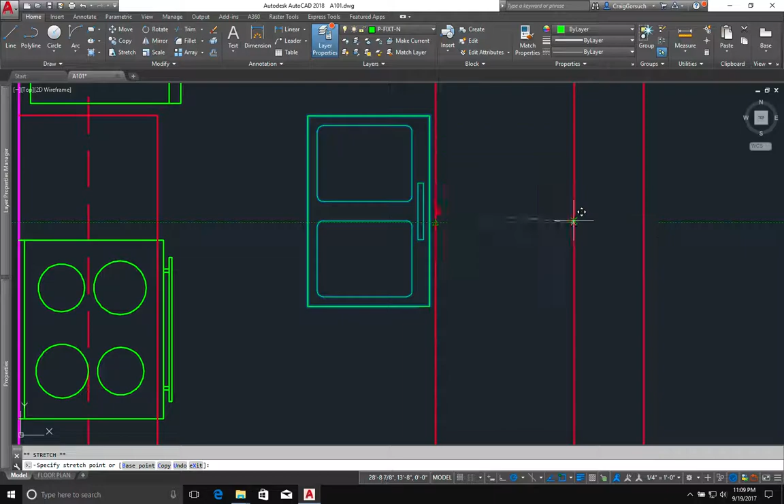Now I want this sink to be centered on this length of the counter. So zoom in, grab a hold of him, and mouse over the midpoint. You get my object tracking. Here we go, you pull it all the way back like that. Left click. All right, now the only thing that I've got left showing here is going to be a dishwasher.

Typically speaking, a dishwasher is designed to fit underneath the counter, and the space for it is 24 inches wide. The actual dishwasher itself is a little bit narrower than that, so you can wiggle and move it around and get it in there. But I also want to see what the overall length of this is.

It should be 9 feet. And this is one of the things that we have to think about when we're laying things out. Yes, right there, it says 9 feet. So if I have, we can think of this as a 3-foot section, a 3-foot section, and a 3-foot section. And I'm going to offset 24 inches.

We'll just stick it down here at this end. And I want this to have the same dashed line as that one. So I can type in MA at the command prompt, press return, select my source object. This is the item with the properties I want to copy. And then click on the item that I want to put it on, just like that.

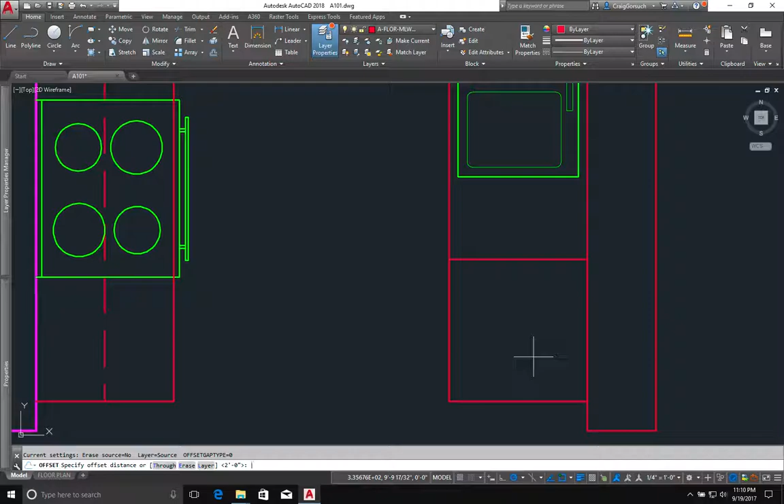I'm going to draw a rectangle, and I want to draw a rectangle right there. Then offset that, oh, let's say we'll offset it 1/2 inch. Zoom in a little bit. There we go, erase that. And now this rectangle we just created,

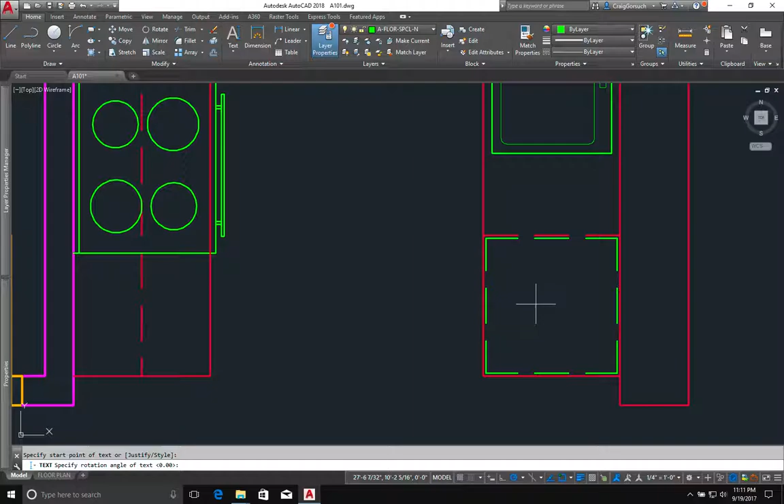I'll set it to Specialties layer and make it hidden 2. I'm even going to come in, let's see, make my Specialties my current layer. Come in for single line text right here. Rotation, I'm going to make it 45. And this is going to be uppercase DW. Press return again.

And this is one of those little things I'm kind of a stickler on. Scroll through here, under justify, middle center. And I want to change its paper height. Well, I don't know, 3/32 seems to be working pretty good. We'll leave it there.

And hover to get that tracking point in the middle, that tracking point in the middle. Drag until I can get them to line up. There we go, just like that. Dishwasher.

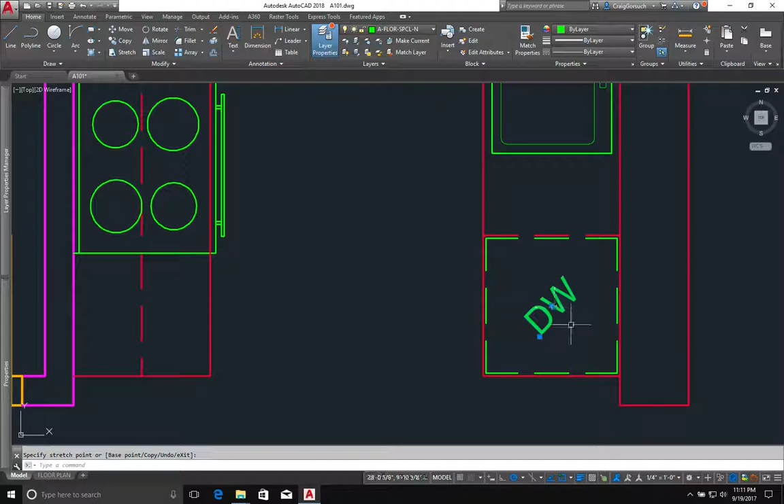All right, and what do I want to put here? Why, that really doesn't look right. I want my dining table here. So go back to the blocks that I shared out with everyone. Blocks, furnishings, let's look at tables.

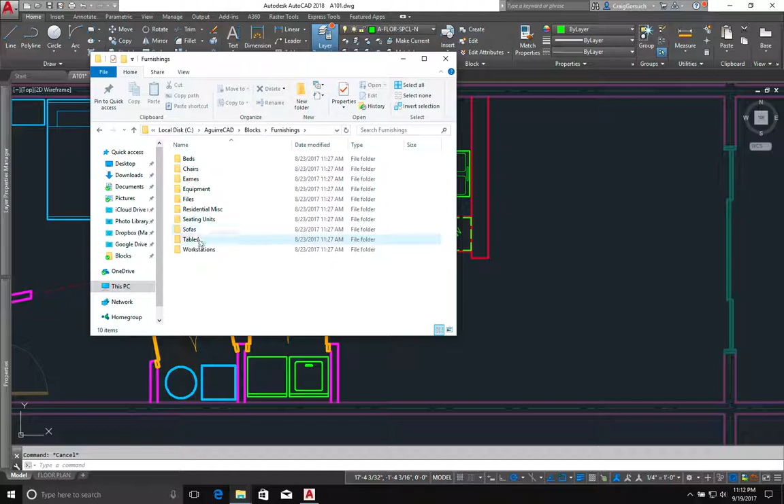Here's break table, that's the one that I used. Yeah, put it right there. It's a good spot for it. Except it's on the wrong layer, so I highlight that. Come up here, furniture.

All right. Now we're going to lay out the furniture and a featured piece of cabinetry in this wall here. We'll make my current layer work. You know what? We're done with the kitchen, we're done laying that out. We'll do the rest of this in another video.